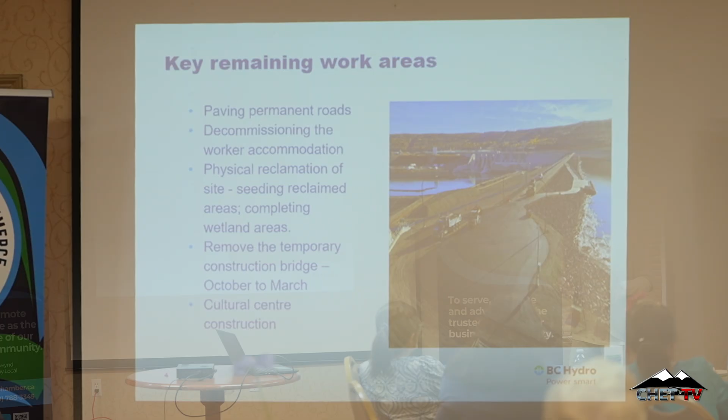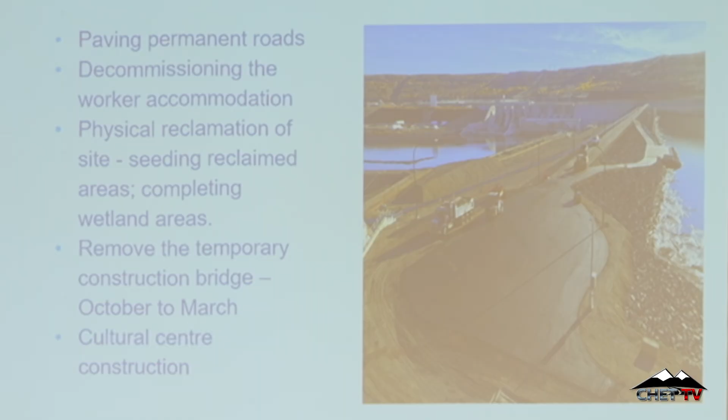So, what are we up to finish this? We are approximately 94% complete. So that last 6% is a lot of things that have to get done in order to wind up the project. This is not an exhaustive list, but one of the things we have to do is pave the roads on site, and the photo is an example of us paving last fall to put pavement on top of the dam. And so we'll be doing that around site.

We need to decommission the worker accommodation, physical reclamation of site, which means reseeding and returning the land that we used for aggregate extraction back to nature. We will take the temporary construction bridge out of the river, and we're building a cultural center.

As we were moving along through the process, we started approximately 2 years ago doing a market sounding to find out from a variety of agencies, government, you name it, whether there was an opportunity for them to repurpose the lodge. And as we went through that process, gradually we came to this year, and as we moved towards closure, BC Hydro saw an opportunity to repurpose it on the North Coast Transmission Line project.

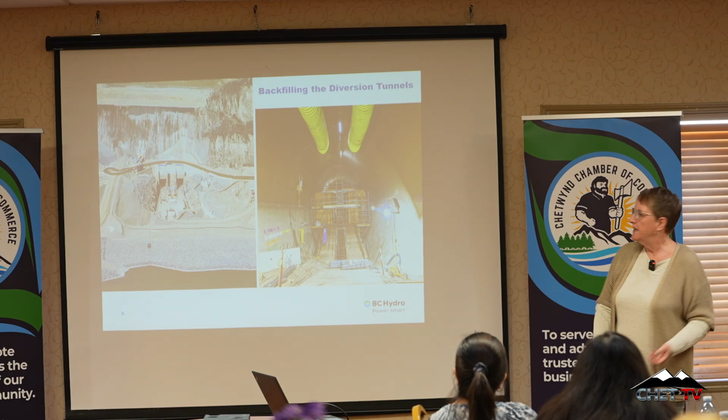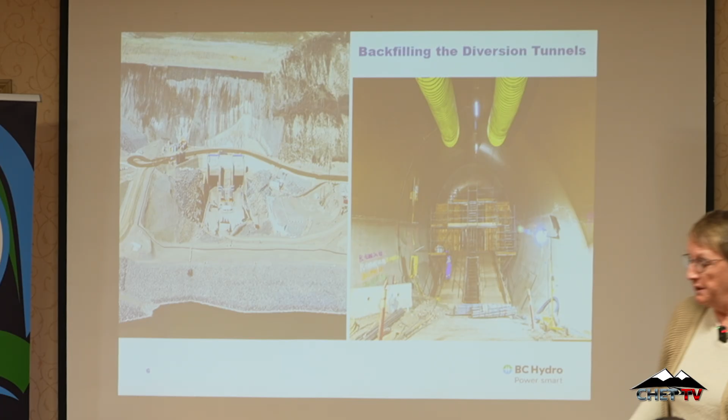The picture on the right shows you some of the infrastructure that they had to install, including the ventilation and electrical, in order to be able to work inside the tunnels to begin the process of plugging them and backfilling them. So what you see here is part of that plug infrastructure. They are now almost completely filled, and they look like this. So this is also taken last week. So the area I just showed you is this area here, and we expect to complete this part of the process probably in about 2 weeks, sometime in July. Anyway, it's nearly done.

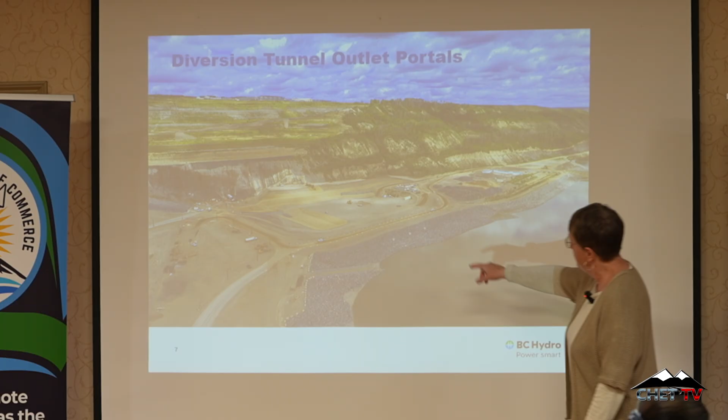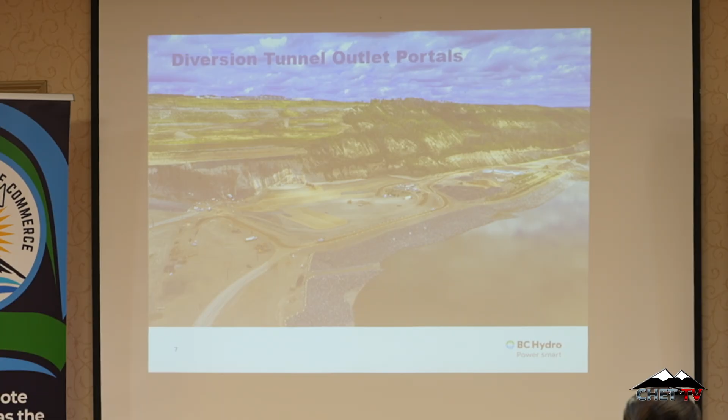So talking of roads, they're in the process of creating the permanent access through here instead of out the back. And this is called River Road. This road would have been the road that has performed all the work in terms of transit onto the site, heavy equipment movement, people, thousands of wheels have turned across that road, and it'll get paved when we're ready to stop moving heavy equipment and construction activity across it.

The next shot takes you to the reclamation. So I mentioned this among the activities.

Unfortunately, the light in here isn't really great for seeing the detail, but I can shut off more lights if you want. If you want to just turn it off, it might help see the pictures a bit better, even though it's halfway through. I was just thinking of our folks with the cameras. Okay. But this gives you a pretty good idea.

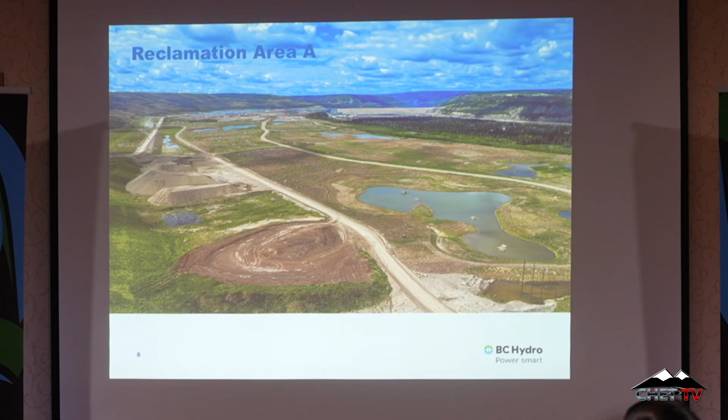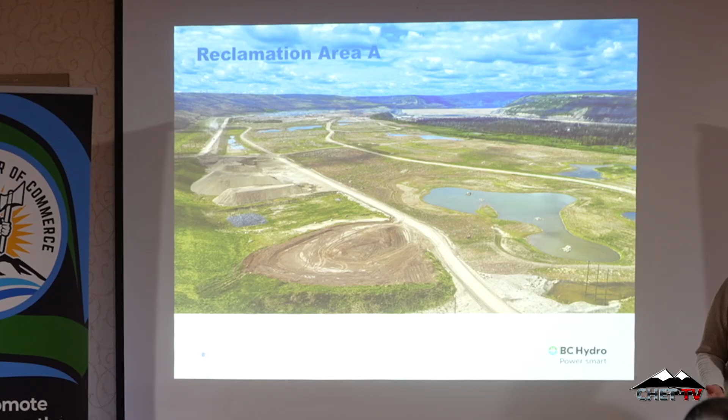So this end here is the east end of the site, and last year they completed approximately 100 hectares of the reclamation work, and it's not really simple. It involves, first of all, contouring and making the land work as far as proper drainage or keeping water. So these pools are deliberate. They will become wetlands. After the snow melt this winter, it starts to populate them, so does rain. And over the years, they will become vibrant wetland habitat for a variety of wildlife.

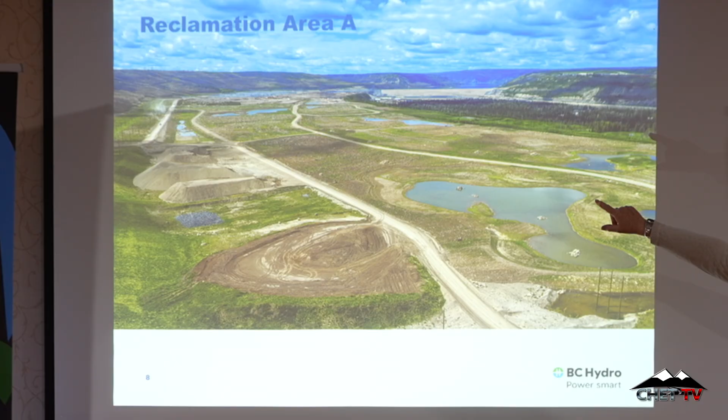So if you look a little further that way, you'll see the dam and generating station is up at the top corner. And we've started on that segment of reclamation work this spring. So the purpose is that anywhere we've done construction at site, they have to take that ground and return it to something more like what it was when they found it, or better. So one of the things they're doing here, early in construction, they collected a lot of the seeds and a lot of the natural plants to the area, took them from site and stored them, and then started to propagate them in greenhouses, one of which is near here, the Two Sisters Greener.

Twin Sisters? Twin Sisters. I always do two. But yes, it was one of the greenhouses that was used to develop the seeds. And so those have been replanted.

So reclamation work goes underway, and then the following year we do the seeding. So it doesn't all happen simultaneously. It's a long process. I expect that the reclamation part of our work will probably carry on for another year or so. It's part of that cycle.

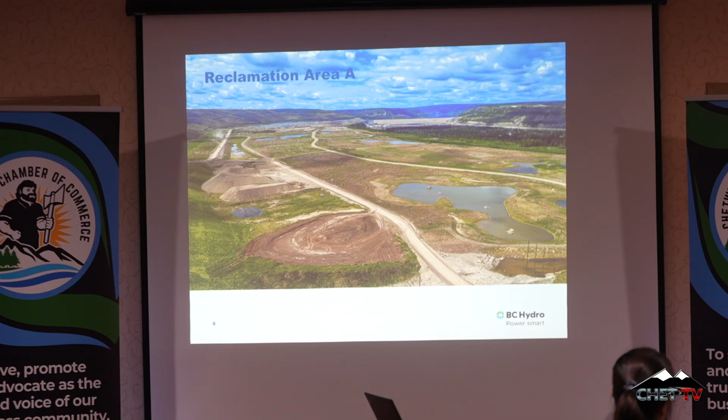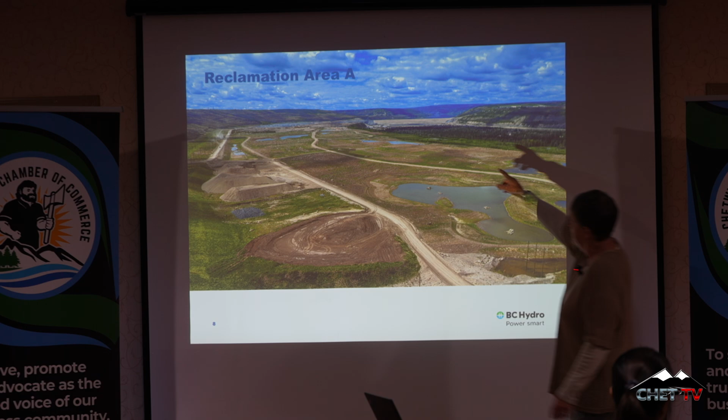But if you have driven Highway 29, where they did the highway realignments and they have the new bridges, you can see areas where they've reseeded and taken out the old pavement. Those are actually growing. It's an example of what reclamation looks like. So that is a full shot looking down the right bank of the site, and this is the dam here, just in case that's not obvious at that distance.

And this takes us inside the powerhouse. This is what it was all done for. All that exterior work is done so that we can generate 1,100 megawatts of electricity from this facility. It is 6 units, 180 megawatts each. They're all operational now. So what happened is we filled the reservoir in 2024, started in late August, and completed it in November of 2024.

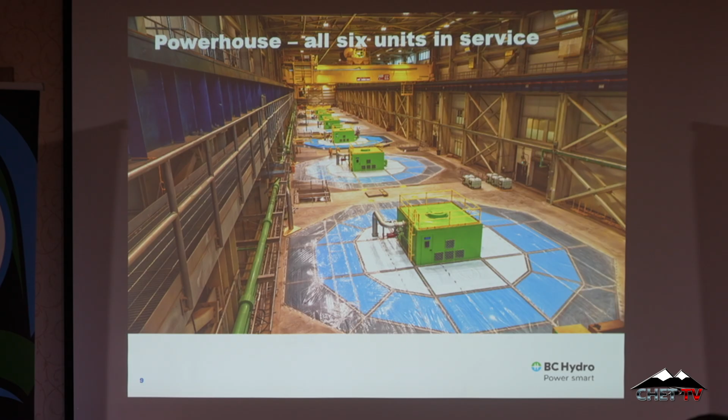We had the first unit online on the 28th of October in 2024, and then each of the next units came on approximately 2 months after that. And the last unit, number 6, came online in August of 2025. So they really got things moving fairly smoothly once they got underway. But that is what it looks like. That's the interior of the powerhouse.

When we're really up and running and there's no more finishing work being done, that plastic will be removed. This building is meant to be kept very clean, and right now we're still kind of doing a bit of construction, so they keep it wrapped up so that they don't get dirt down inside. It has to be kept quite clean.

So this is an artist rendering of the cultural center. Now the cultural center is a vision of the nations working with BC Hydro to build a facility that will have, first of all, a way to house the artifacts that we found during construction. So there's quite a considerable amount of that. There's some paleontological, so animals as well as artifacts.

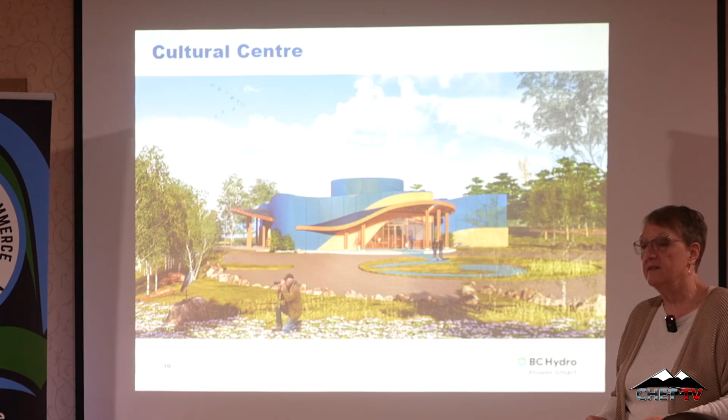And also we have 12 participating nations currently working to gather the content that will be housed in the building. And also the purpose of the center is to educate visitors and expose them to local Indigenous culture, and also to provide a healing space. So it will be public. It's going to be down below.

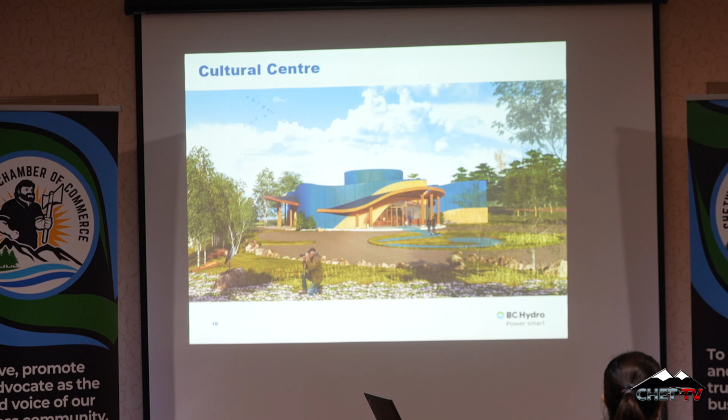If you've been anywhere near the site, there is currently a public viewpoint up at the top of the site, and the road travels down, and it will be the access to get to this. And eventually, when all of the remaining construction buildings are removed, it will make more sense because the whole landscape will have been returned, and then this building will be on the north bank above the dam. That'll be finished sometime next year. It's the last piece of active construction.

So the D.A. Thomas Road upgrade and day use area is complete now. It's open, which some of you may have actually been to. It's open daily from 8 till 10 p.m., and as the days do shorten eventually, it'll be open until 9 p.m., and then it'll close in the winter.

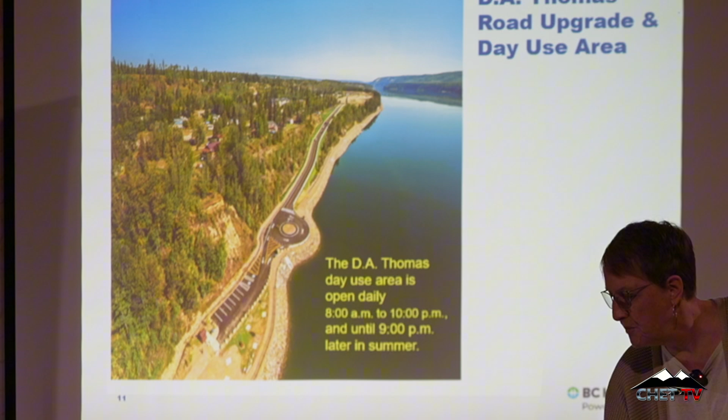But it has parking, it has some day use facilities, picnic tables, toilet. When we're ready to open the reservoir, it will also have a dock, and this facility enables people to bring small craft. So car toppers, canoes, kayaks, that kind of thing. And there you have it. That is actually the end of the presentation. That is an opportunity for questions.

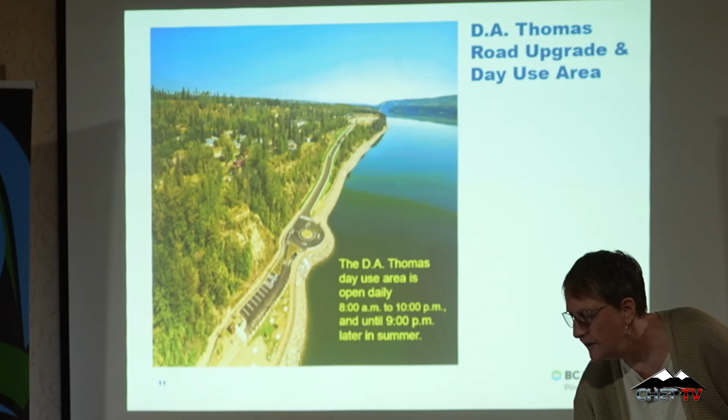Is that a walking trail along? Hang on, get back to the picture. This is the shoreline protection berm. This piece here, is that what you mean? Yeah, and is there like a... And you can walk there. Okay. Part of that berm extends a little further back, and there's a piece of it that's gated because it travels along below private property.

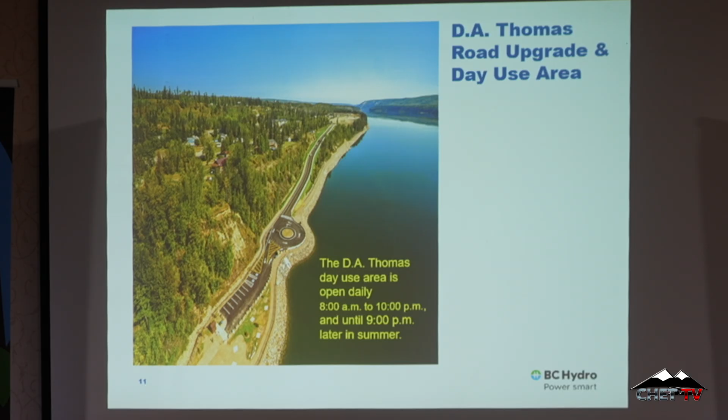But this piece is walkable, and it takes you up to that top corner there and loops back behind and joins the street system. So it is actually quite nice. As well, this path here will take you up behind the museum area. Oh, neat. So it's been linked together. I haven't seen it very recently since it's been opened, but it's a nice place the way they designed that. Awesome.

Got a question. Sure. So back at that end of the reservoir, approximately how much higher did the water level raise? Out at Hudson, by Hudson's Hope? D.A. Thomas end.

So it's kind of compared to what it used to be. It's a good question because, from one perspective, as you move to the tail race, that's the shallower end of the reservoir. But some of the channels through there, I think we say it's 10 meters deep. So previously it might have been closer to 1.5 meters, to give you a bit of an idea.

So the shoreline protection berm was the answer to protecting it from wave action, because people will recreate on the reservoir. There will be waves created by boats, potentially by weather, and there needed to be a way to buffer the bank structure. So now they've made a bank structure that can actually be used as well, which was something they consulted with the community about during construction. Any other questions?